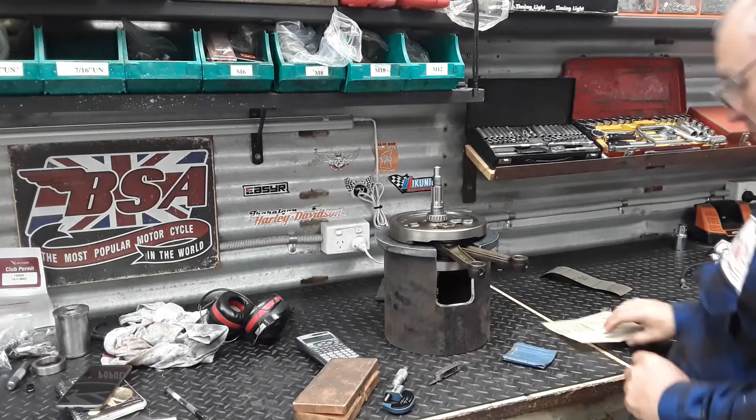Well, we're not going to the lathe straight away. I've got to measure this up. So if you've never seen these before, these are thread measuring wires.

This being a 16 TPI thread, we're going to have a look at 16 TPI, and the wire size that I need is a 40 thou wire. So we'll go and have a look, and it's these wires right here. You actually have two wires on one side and one wire on the other, and you measure across the wires. That measures the effective diameter of your thread.

So I'll write that down, and then when I cut my external thread, same measurement. I've actually had these for close to 40 years, and they are really handy at times, especially when you've got to do some odd bod sort of threads. But anyway, I'll measure this up, get a dimension, and then that'll give me the ability to screw cut the external thread.

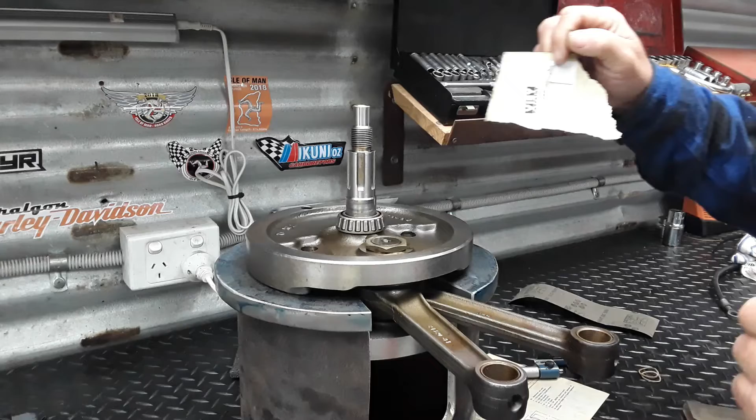Alright, so the general concept is you've got to get it as per these instructions here. Two wires on one side, one wire on the opposite corresponding side, measure across it. I actually used to have, back in the day, a piece of polystyrene foam in my toolbox for this very job, but we're just having a look, that's fine.

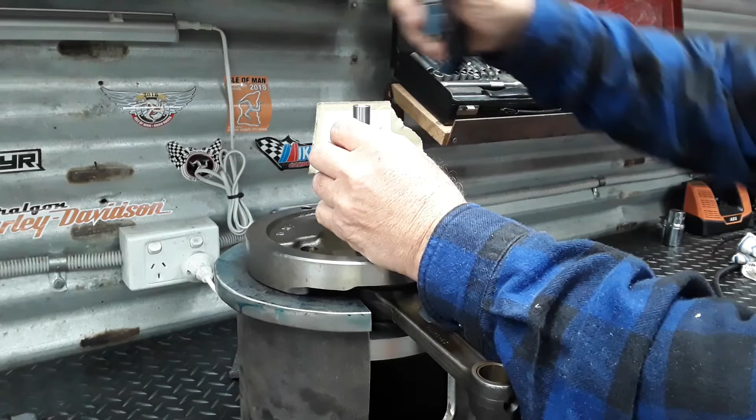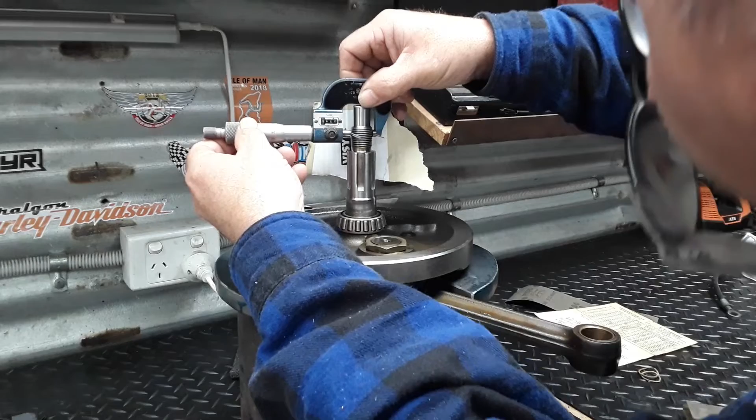Then I can delicately hold them, get a micrometer across it, and get a measurement. I should have adjusted the mic up a bit before, there we go. This way I can get a bit of a feel on it. I've got 774. Yeah, 774. That's our measurement that we're going to be aiming for.

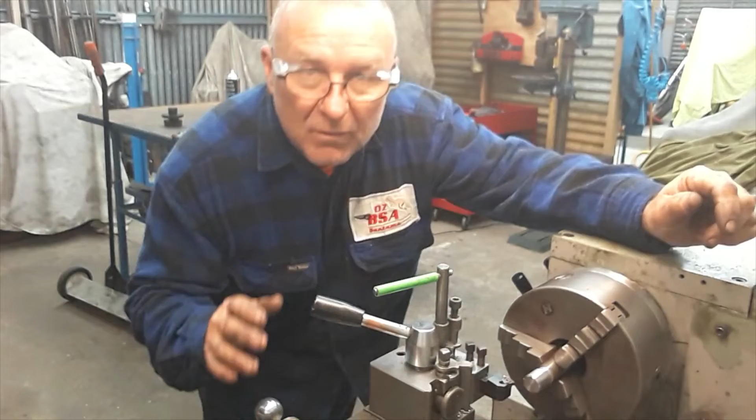All right, so this is going to be our test stub. I'll cut a thread on this, get the thread measuring wires, and measure it. Set the lathe up obviously to cut the required pitch, and we'll just get stuck into it now.

I don't go too fast. Now this lathe has got no reversing gearbox on it or anything like that, so that's why I've got a bit of a run out on the end. And if you try and reverse it when it hasn't stopped, it actually keeps going in the same direction. So, it's not a high quality machine by any stretch of the imagination, but it does a pretty good job.

So what I'll do is I'll do a touch mark, zero the digital readout, and then we'll be able to start doing the depth of thread from there. About 42 thou, I think, or something like that. So I've just done a touch. I'll go and get the screw pitch gauge, and I'll verify that we're actually cutting the right pitch.

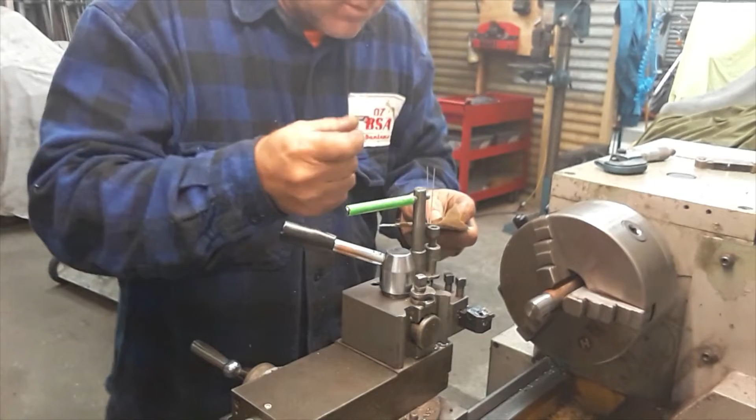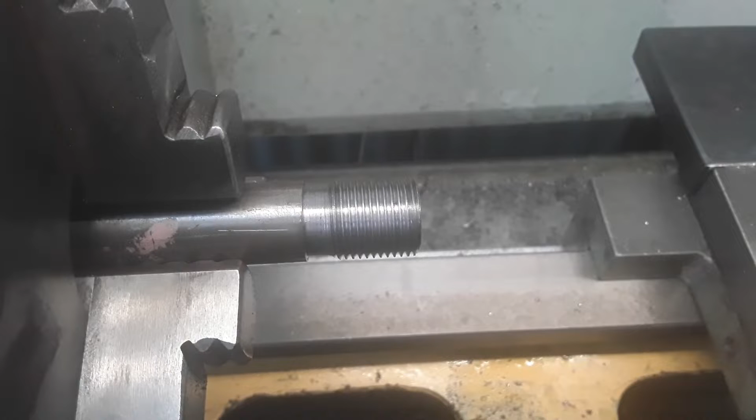All right, so we've got our thread getting pretty close to size, so I'm just going to throw the thread measuring wires over it and measure it up and just see how we go. My apologies for chopping my head off in the picture too. And that's our thread finished. So now I'll be able to start making the actual puller. I'm pretty happy with that. That ended up within half a thou of what the original is, measuring it over the thread wires.

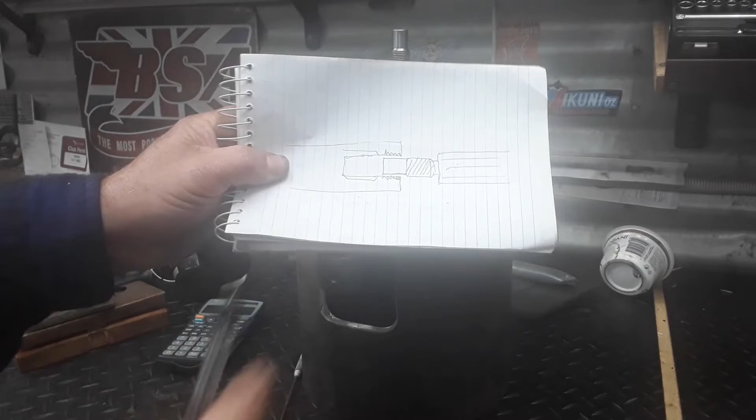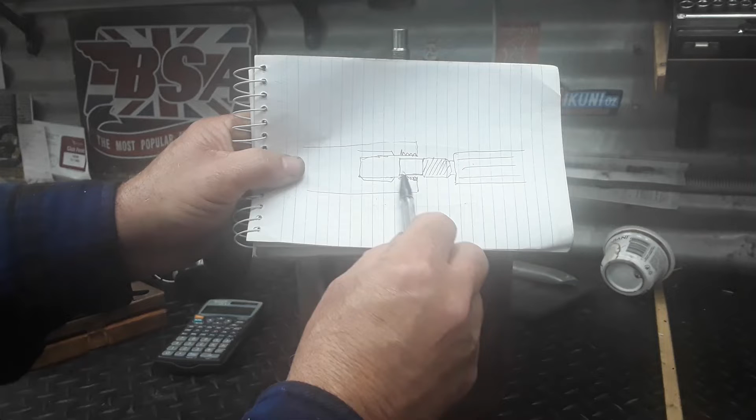I'll give you a heads up about what we're trying to achieve. This shaft represents this portion of the crank. I've got to cut an internal thread, but the big problem is my lathe doesn't have a brake, so I need some run out for the tool behind the actual thread. So when I'm machining this, I'll have to machine it along down there.

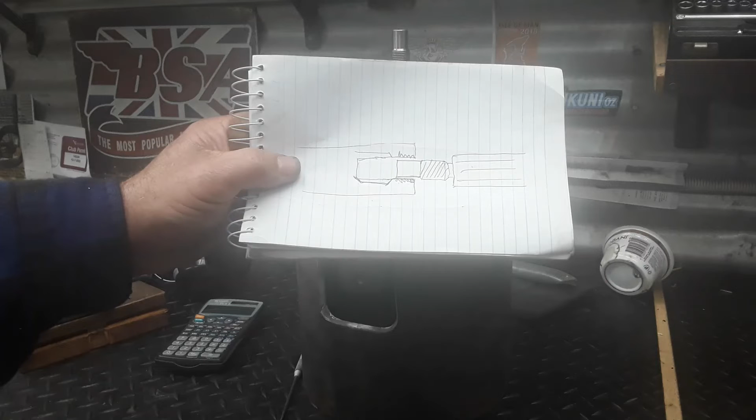My tool will actually be going that way because it's boring, so that when it runs out, it's not still cutting. I can just turn the lathe off, wind the tool back, then bring it back out, wind it back down, and take my next pass. That's a problem with a cheaper type lathe - it doesn't have all the functionality of a really good quality industrial machine. But anyway, you just got to work around it, no big deal.

So I'll get on to machining that. After I machine this, the stub will have a thread machined all the way along the outside for a big nut. But we'll get this internal thread done first.

So after going to all elaborate lengths to explain to him, diagram what I'm going to do with the internal thread, I went and had a look, and I've actually got a 3/4 inch UNF tap. I've got no idea what I've got it for or where it came from, but anyway I've got one. So I don't have to go through all the rigmarole of screw cutting - I can just tap it, which is what I'm going to do now.

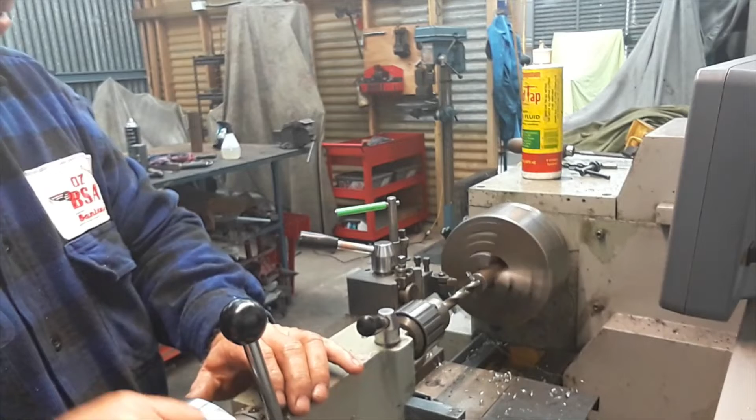So all I'm doing now is starting to drill out the hole to accept that 3/4 inch tap. I'll drill this out all the way. This will also give the clearance for the little stub piece on the crank above the thread.

Tool change out, and we will start boring this out too. The tapping size in metric is 17.5 millimeters. I've just done 1/2 inch, so 12.7. Actually I'll change this back over to metric because I did have it on imperial when I was screw cutting.

That sub that I actually no longer need - but anyway, what a complete dickhead, hey? Anyway, that's what happens, eh? Not fast enough, let's get some speed into it.

So just taking the final boring cut now for the tapping drill size for the tap.

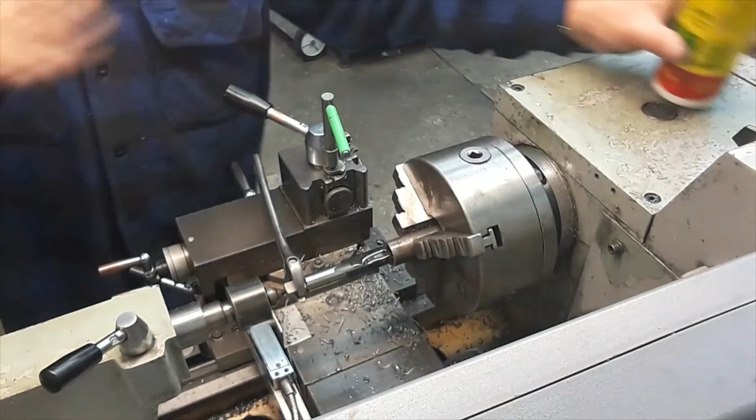Time to start cutting an internal thread. Obviously the lathe's out of gear, the motor's actually turned off - you wouldn't want to be doing this with any chance of the machine starting. I'm just following up, just off camera here, winding the tailstock to follow up and keep this tap nice and dead straight.

Right, let's break the chip. So me going backwards is what they call breaking the chip. You're getting a little curl of metal in there, and by breaking the chip, it just frees it up and drops the swarf that it's cutting straight into the flute here.

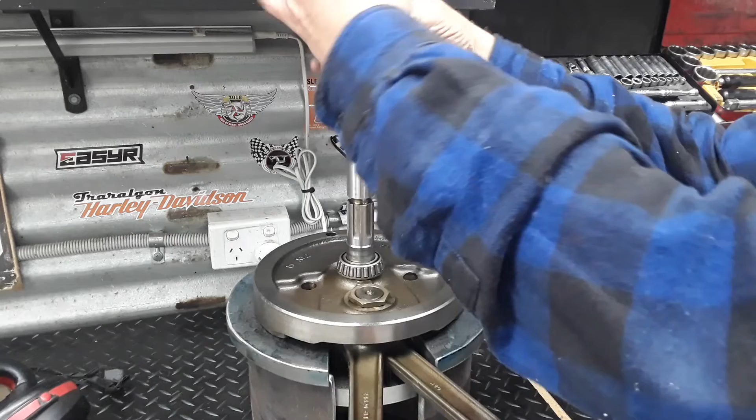So this is working pretty good, pretty happy. Well, that's good. I'll polish the rest of that up now. I'll cut it off around here somewhere and put an external thread on there. I don't know what size to do yet - we'll wait and see, I'll work it out.

So I've decided to cut a pretty fine thread on there. I've actually just put a 26 TPI thread on this. And we're not far off full depth now.

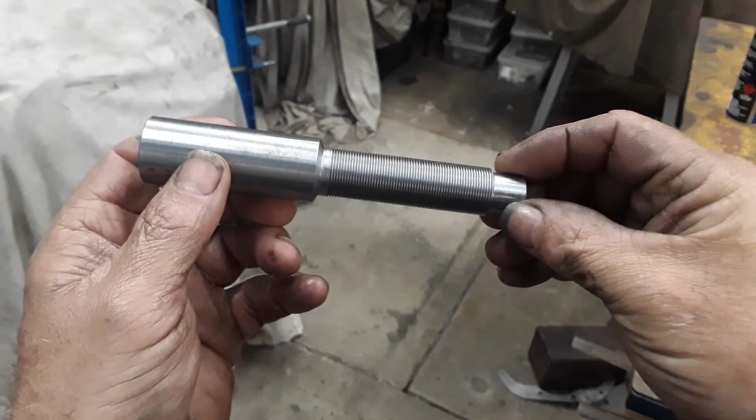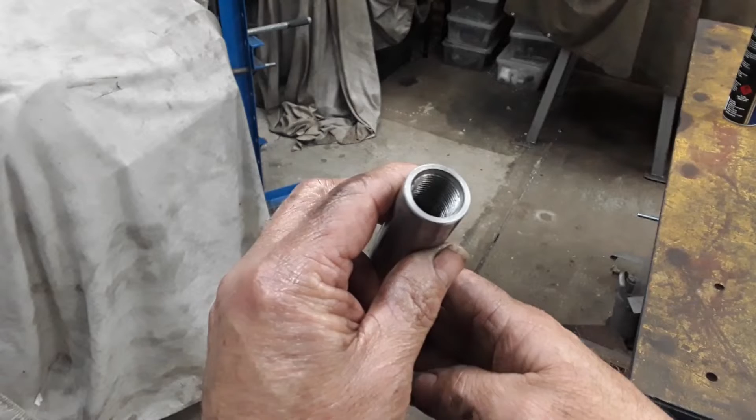So that's our thread on there. What I'm going to do is drill a hole through here so you can put a little T-bar through it. It's pretty hard to see, but that's the way our internal thread and everything worked out - you can see it there.

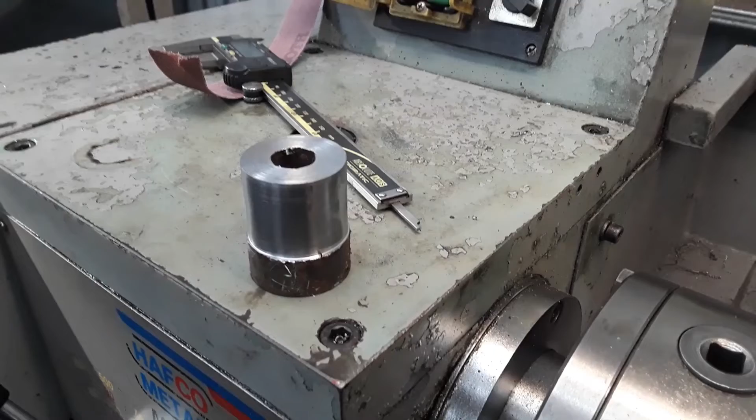So now I will start making a nut to suit this. Sorry about that, it's trying to focus. Okay, so that's the blank for the nut. We'll get that over on the milling machine and we'll mill a hex on that.

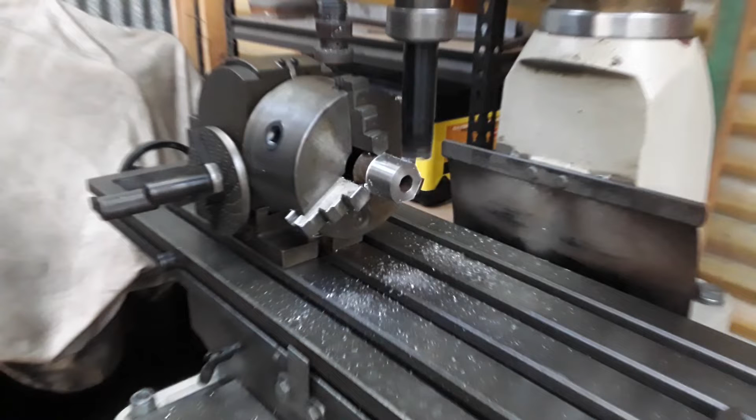Okay, we're coming up to the fourth flat now. So I'm cutting this at 1mm increments. And all's going pretty good.

So there's our nut been blanked out to size, and we're ready to start screw cutting the thread up the middle of that. My apologies for having to hold the camera. We've got the thread in there and we're getting very close. That's just tightening up. So we'll take a couple more fine cuts and we'll see how we go.

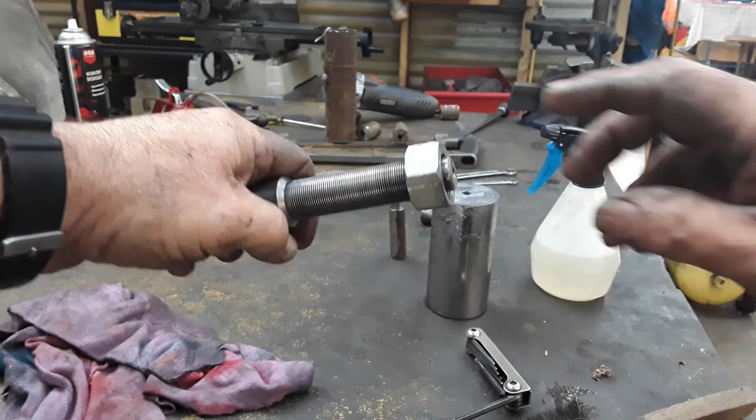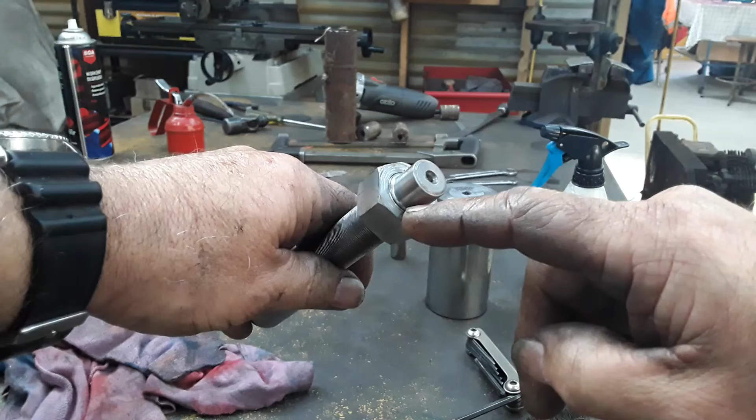So we've got our nut done, and I'm pretty happy with that. It's a good fit. I had a couple of challenges because the boring bar isn't just got in the hole. I actually had to take a pretty deep first cut on the thread to give the boring bar clearance around the back. So it was a little bit of a tentative job, but it's turned out pretty good. So from here, I now have to make the spacers that go over this, that this nut actually pulls the bearing down with. So we'll get into making the spacers. I'm actually going to make 2 or 3 so I can use it possibly for other stuff. But yeah, pretty happy.

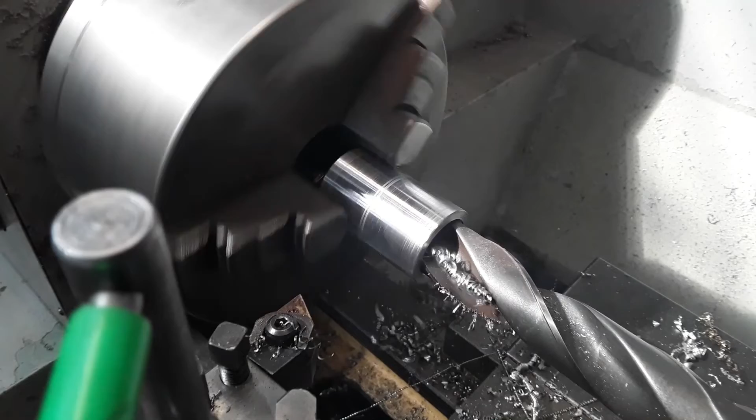Okay, so what I'm doing now, this is one of the spacers. So I'm just drilling out the bulk of the material out of the centre of the spacer, and then I'll go through with the boring bar and I'll machine it out.

So what I'm doing now is actually making the cap that will go on the very top that the nut will bear on, and that shoulder there will locate inside the spacers. So I'm just about getting ready to part it off now.

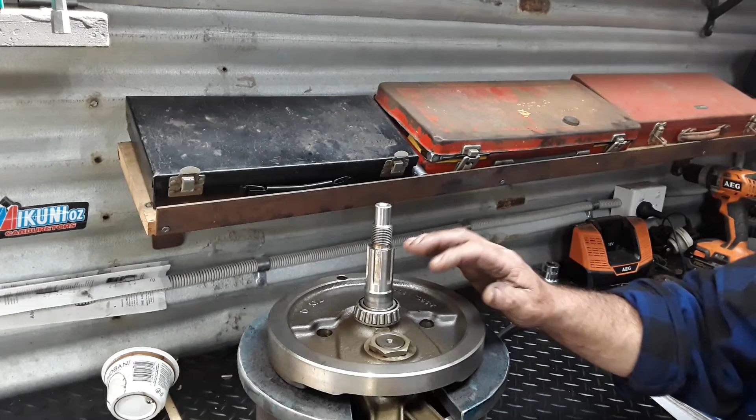Alright, so the whole purpose of making this puller is to pull this bearing on, and there's another bearing, I'll just grab it. That goes on this way, and in between these two bearings is a spacer. And that spacer shims out your end float for your crank and your crankcase.

So both these bearings will have to be pressed on. Obviously I've got to take this one off because I'm changing it. So first one to go on is this spacer here. It's got a relief in there to fit over this bearing diameter here. Well, first thing to go on is actually that.

So we'll just screw that down. Another spacer. Another spacer. This is shouldered. And then your nut goes on to pull it all down. So obviously it's got to pull down from a certain height. That's why I've got different length spacers in to be able to pull it down, just chop and change them a bit. Well, these two anyway, you see this one's slightly longer. So that's how it all works.

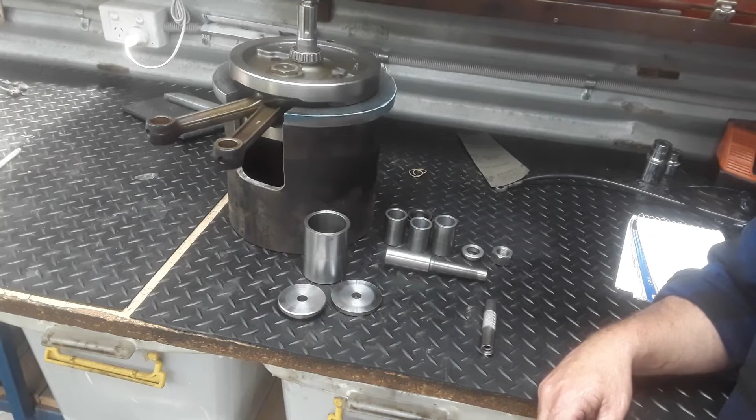So these are all the things I've made over the last 4 days it's taken me to make all this stuff, so I'm able to reassemble my Harley engine once I get all my parts. So there's a little bit of work involved, but it's probably a lot cheaper than taking it to a bike shop. A lot of these pullers and things like that do cost a fair bit of money, so pretty happy with the end result. Yeah, there's a bit of work involved, but you know, it's what we do.